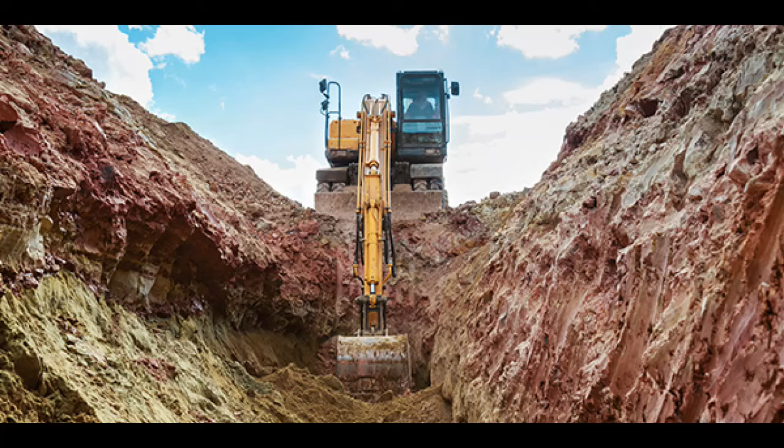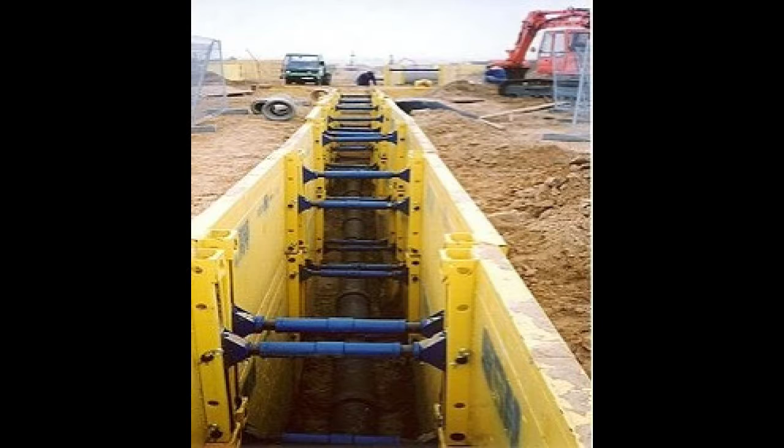Hey guys, welcome to our excavation safety meeting. Today we're going to have some fun. We got a little video presentation for you. Then we got a slideshow. We'll go through and learn some more about excavation safety. And then afterwards we're going to have a quiz, so pay attention to all of the slides. And as always, winner gets a free ice cream cone. So here we go, guys.

This is Jeopardy! Good evening, ladies and gentlemen. Welcome back to this week's edition of Safety Jeopardy. Our topic for the week is excavation safety. Let's take a minute and meet our contestants today. Our first contestant, Joe Digger. Joe, where are you from? Alabama. Joe from Alabama. Great to have you with us today. And our second contestant is? Safety May. Where are you from, Safety May? Los Angeles. Great to have you with us today. And since you're our best looking contestant, you get to choose first.

Let's go with excavation for 100. Excavation safety for 100. Question is, how would OSHA define an excavation? Joe. Well, my daddy had one of them. Had a big bucket on the end to scoop up dirt. Oh, Joe, I think you mean excavator. Not quite what we were looking for. Safety May? Excavation is defined as any man-made cut, cavity, trench, or depression in the Earth's surface formed by earth removal. That's perfect, Safety May. 100 points for you, and you have the board.

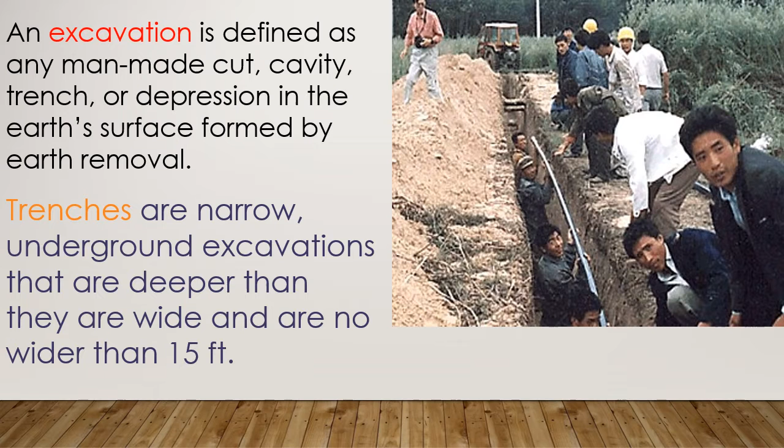Excavation fatalities are a serious problem in construction. Cave-ins are the cause of 3 out of 4 deaths. According to the Bureau of Labor Statistics, approximately 275 workers have been killed in cave-ins from the years 2000 to 2006 in an excavation accident.

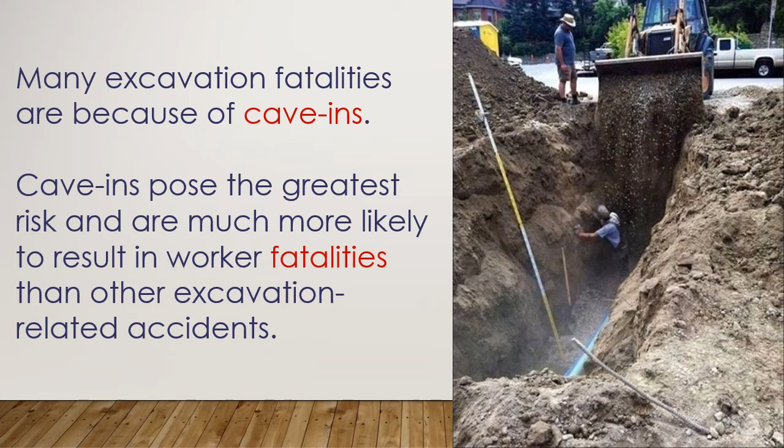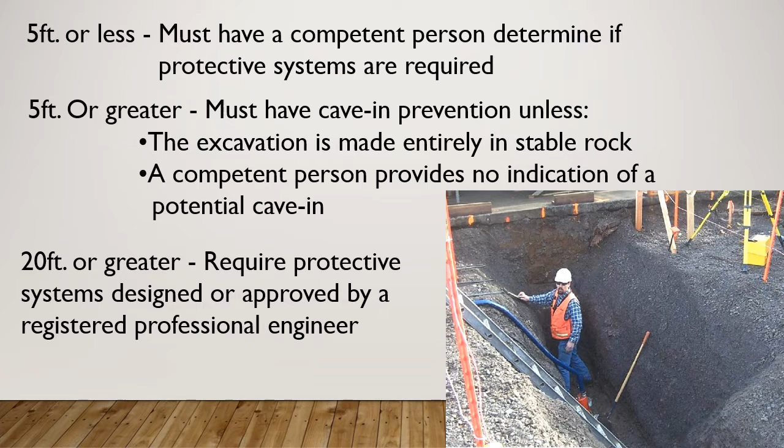Excavations 5 feet or less must have a competent person determine if protective systems are required. Over 5 feet, excavations must have protective systems in place, unless the excavation is entirely in stable rock, or a competent person provides approval and indicates no risk of cave-in is involved. A registered professional engineer must provide approval for excavations of 20 feet or greater.

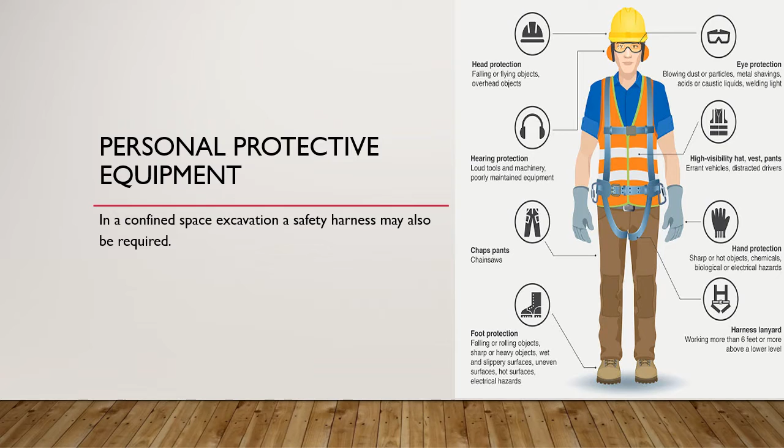Personal protective equipment must be worn on the job site. Hard hat, safety glasses, high visibility vest, gloves, protective boots, along with ear protection are all required. When working in a confined trench, a safety harness may also be necessary.

Each excavation is unique and requires an approach that is carefully planned. Soil classification, weather, fall protection, ladder use, location of utilities and groundwater, protective systems, traffic and nearby structures are all considerations to be assessed before beginning.

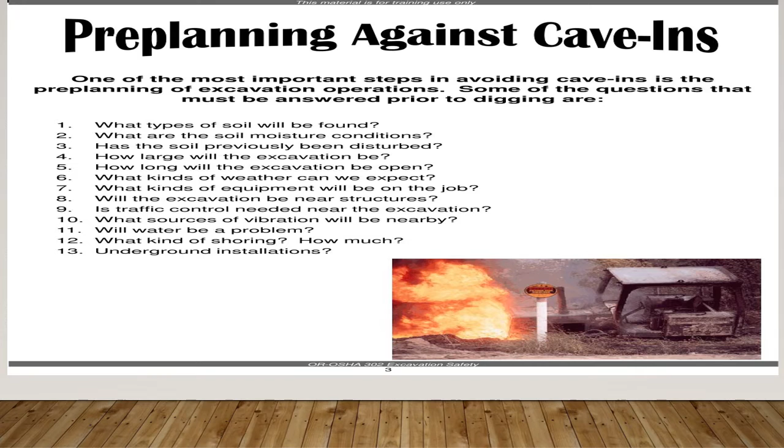What is a competent person? This is a person designated to ensure safety responsibilities are being met. OSHA defines a competent person as one who is capable of identifying hazards and who has the authorization necessary to take prompt corrective measures.

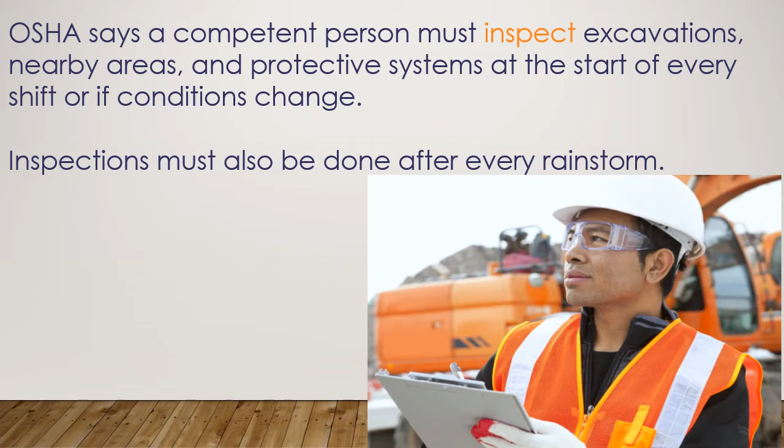Analysis of statistical data discovered a disproportionate number of accidents happening in excavations on Mondays. After changing conditions over the weekend, inspections before entering the excavation are vital to assess any safety issues. Inspections after any occurrence which may increase the hazards, or if a hazard is anticipated, are vital.

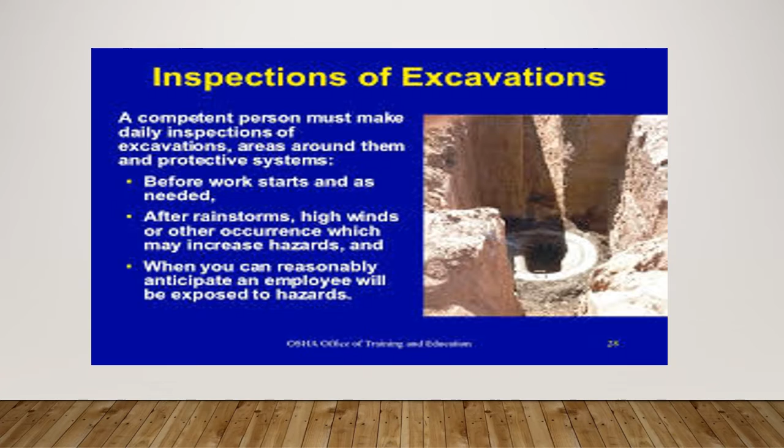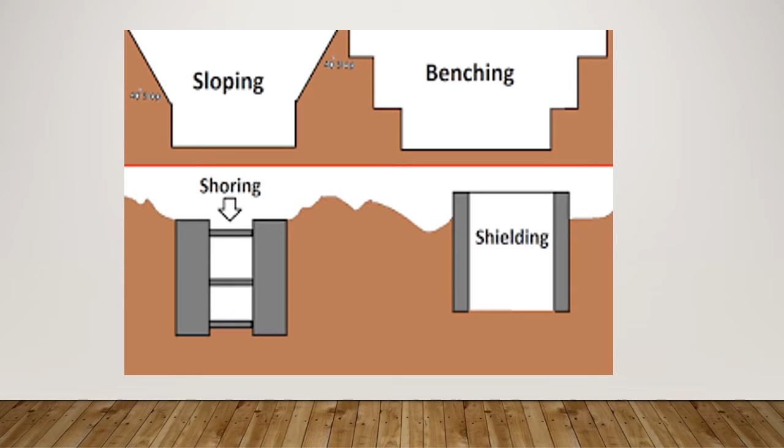Methods have been developed to prevent cave-ins. These include shielding and shoring, sloping, and benching. Shoring is designed to prevent excavation collapse. The type of soil, depth, and width of a trench will determine the vertical and horizontal spacing used. Hydraulic shoring is the most common shoring system.

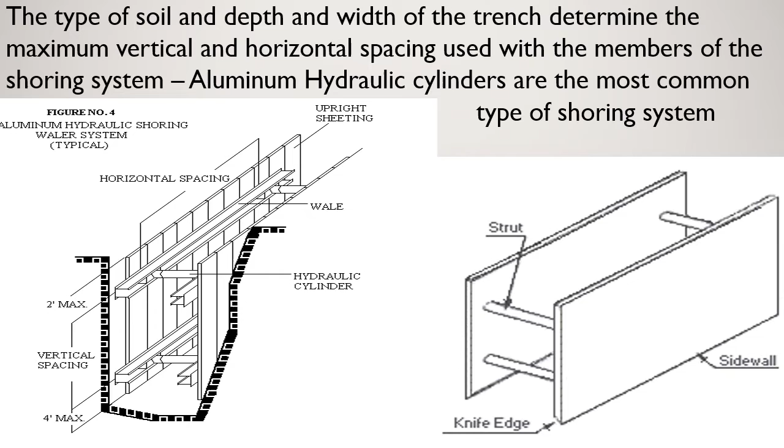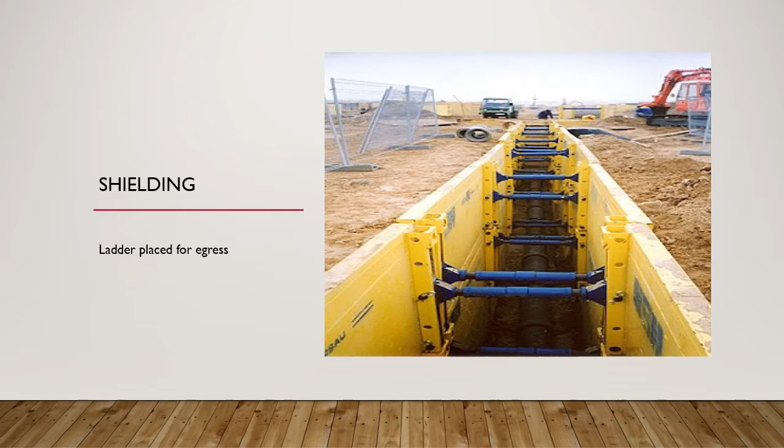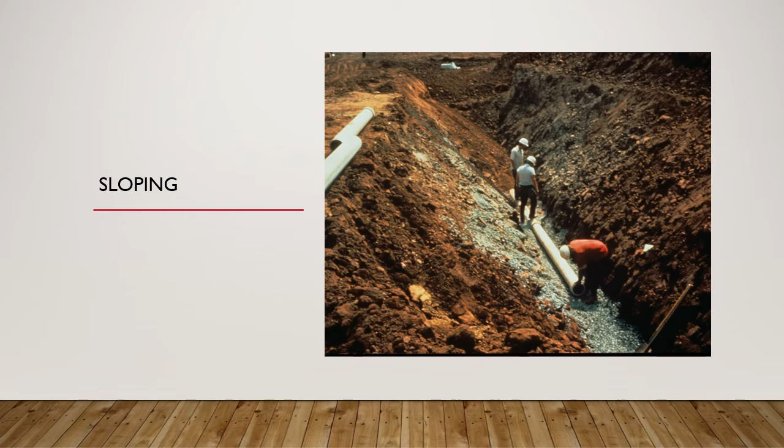Shielding is designed to protect workers should a collapse occur. It is a protective box inserted into the excavation, as you can see here. Sloping is another technique used to protect workers from cave-ins. The conditions of the soil affect the preventative measure that will be chosen. It is the slope to which an excavation face is excavated. The soil type is in direct relation to maximum slope and slope angle.

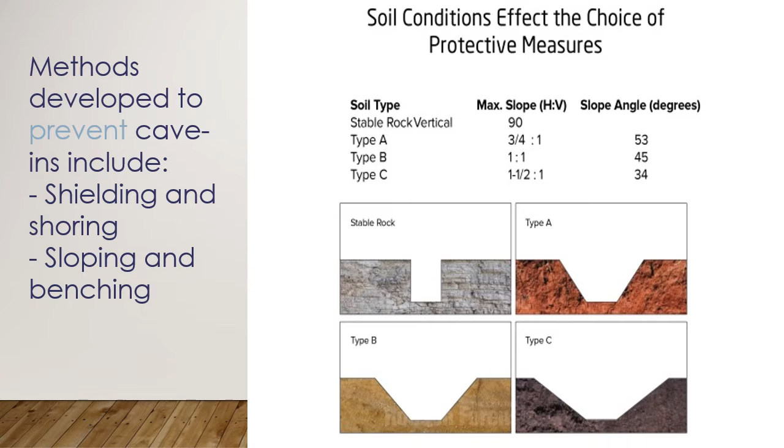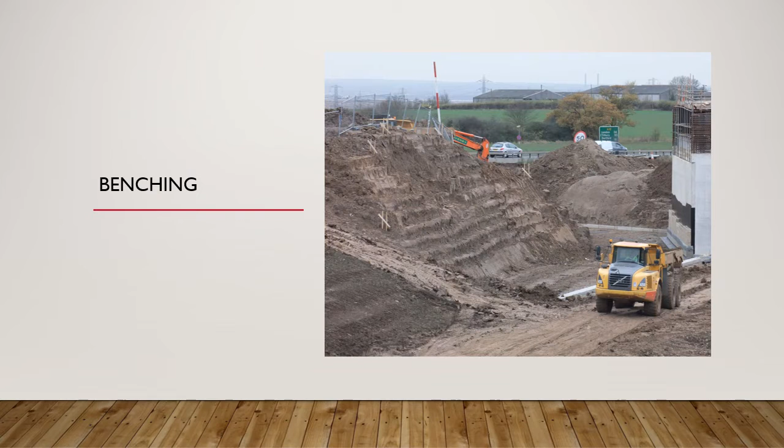Benching refers to excavating the sides of an excavation to form one or more horizontal levels or steps, usually having vertical or almost vertical surfaces between levels. Access and egress ladders, steps, or ramps must be located so workers do not travel more than 25 feet laterally within an excavation.

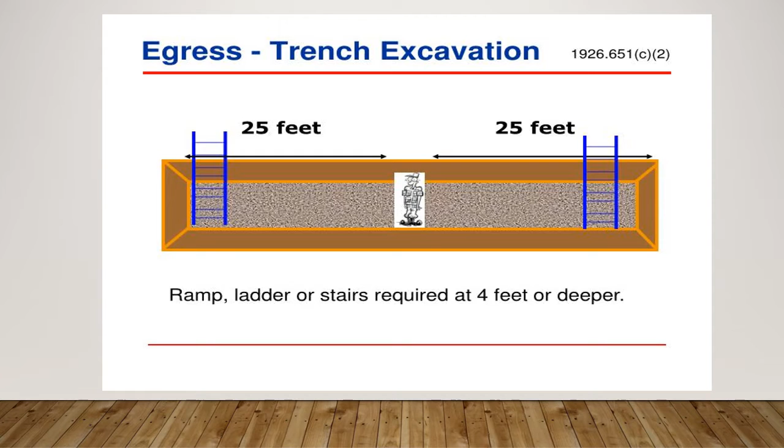The identification of the type of soil by the competent person is a necessary part of evaluating the safety of an excavation. Stable rock is a natural solid mineral that can be excavated with vertical sides and remain intact. Rock is the most stable type. Type A soils are cohesive soils with a compression strength of 1.5 tons per square foot. These include clay, sandy clay, and clay loam.

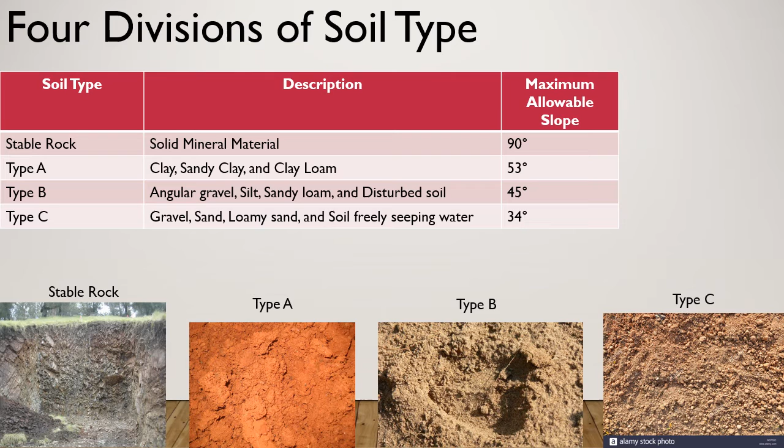Type B soils are cohesive soils with a compression strength of 0.5 tons per square foot. They include angular gravel, silt, sandy loam, and disturbed soil. Type C soils are cohesive soils with a compression strength of 0.5 tons per square foot. These are the least stable soils, including gravel, sand, loamy sand, and soil freely seeping water. For safety purposes, we always assume a soil is type C unless a competent person instructs otherwise.

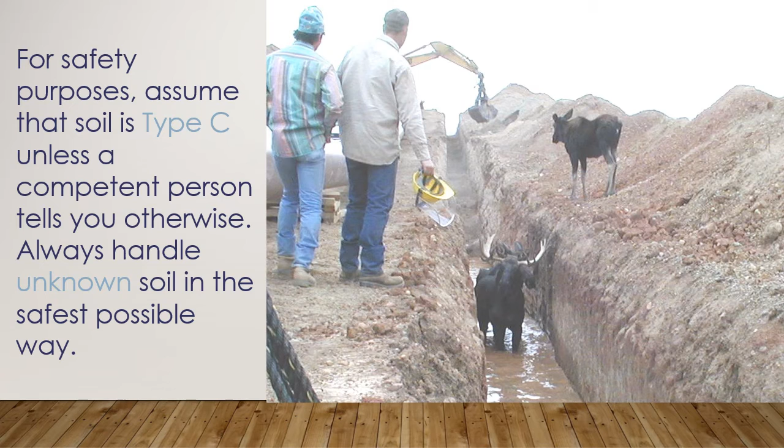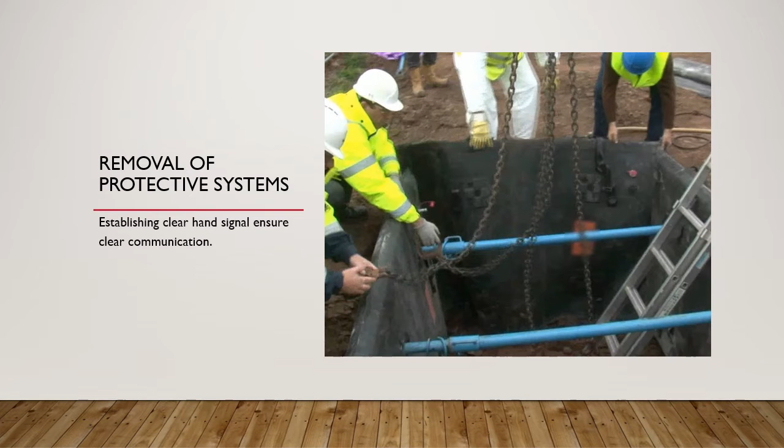The removal of protective systems requires a step-by-step plan provided by the competent person. A warning system of established hand signals ensures clear communication during this process. There is always room to improve. Evaluation is an important tool to determine what could be improved for the next time.

When in doubt, ask questions before proceeding. Err on the side of caution. Safety is everyone's responsibility. Remember, always be safe.

Okay, guys, time for a pop quiz. Let's see how much you remember. Blank are defined as any man-made cut, cavity, trench, or depression in the Earth's surface formed by earth removal. And the correct answer is A, excavation. Good job, guys. Excavations with a depth of blank must have a competent person determine if protective systems are required. And the correct answer is B, 5 feet or greater.

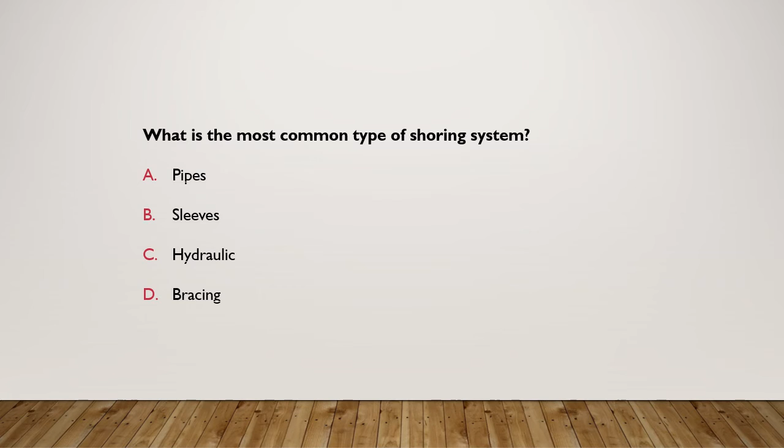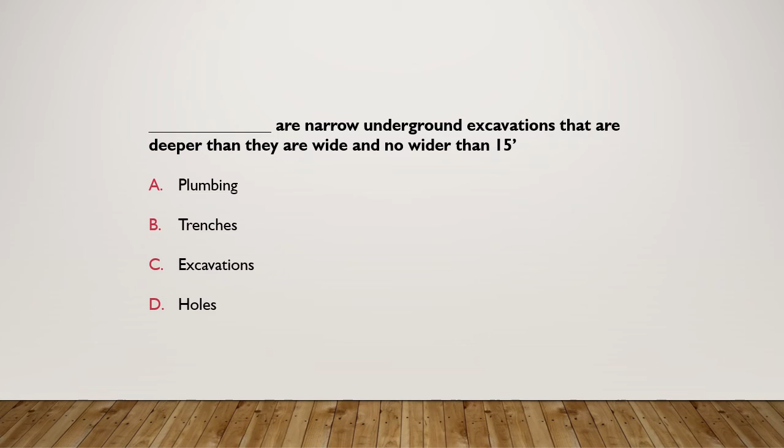What is the most common type of shoring system? And the correct answer is C, hydraulic. For safety purposes, assume that soil is blank unless a competent person tells you otherwise. And the correct answer is C, type C. Blank are narrow underground excavations that are deeper than they are wide and no wider than 15 feet. And the correct answer is B, trenches.

OSHA says that a competent person must inspect excavations, nearby areas, and protective systems blank. And the correct answer is B, every day and sooner if conditions change. Which of the following are methods to prevent cave-ins? And the correct answer is D, both A and B.

Hey guys, thanks for completing this quiz. I hope you'll remember the things that you've learned and stay safe while excavating.